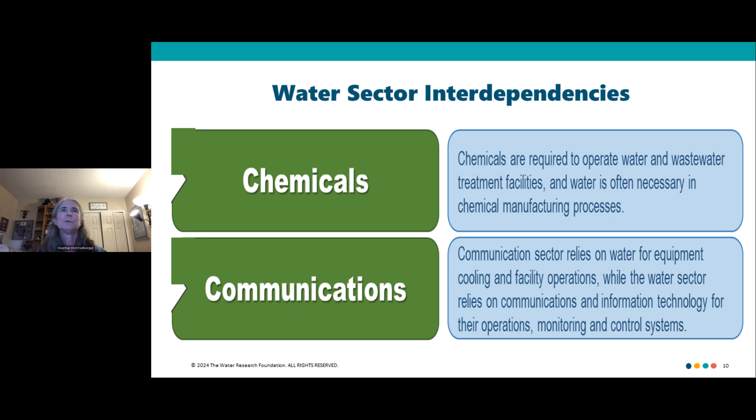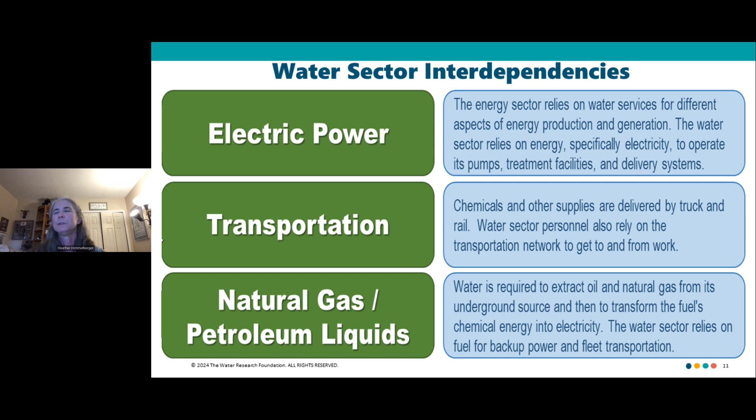Fuel requires water to extract oil and natural gas from its underground source and then transform the fuel's chemical energy into electricity. The water sector relies on fuel for backup power and fleet transport.

So let's get into why these interdependencies can be disrupted. One thing we looked at is how these sectors work together to plan, respond, recover, and adapt to what we call black sky events. Black sky events are high impact, uncertain probability events that can cause a combination of severe physical damage to infrastructure and widespread long-term duration outages.

Since the beginning of the project in early 2021, utilities were dealing with more frequent and severe events. And of course during that time they were also dealing with one major event that affected everybody, which was the pandemic. The shocks and stresses of black sky events disrupt those connections between the water sector and other sectors.

So when we were interviewing the participating utilities, there were many discussions on how they plan, respond, recover, and adapt to these black sky events. And from those discussions emerged some common themes.

We used those common themes to create this document and put them into six themes, which became modules or chapters in the report. They were based on utility examples of how they absorbed, adapted, and capitalized on the shocks and stresses they were exposed to.

About 70 case study examples from all the utilities mentioned at the beginning of the talk were included. The fundamental practices module focuses on the major critical infrastructure or lifeline sectors we just discussed, like power, fuel, chemicals, transportation, and then the subdomains of operational resilience and water availability.

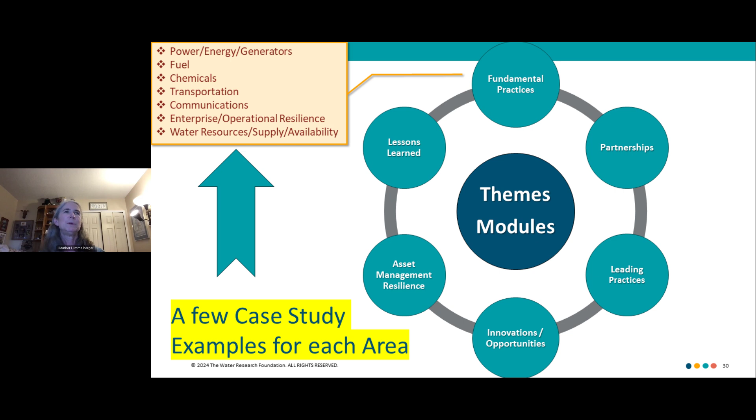There are again 70 case studies in here, so there's going to be way more than we're going to cover today, but I just wanted to share a few for each one of these so you can get a flavor of what the document has in it.

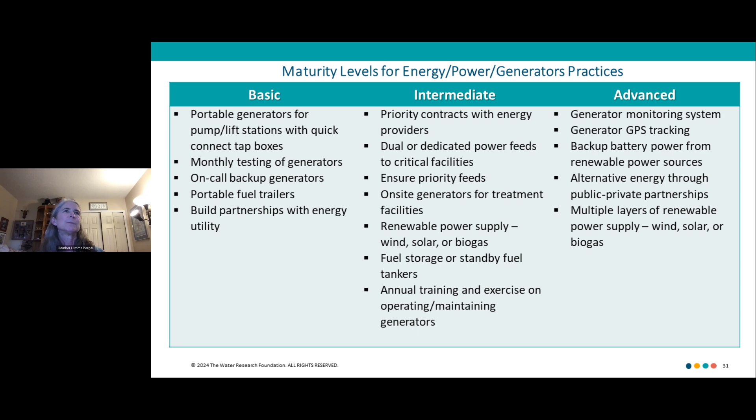So we're going to start with energy, and energy is basically the most important sector. That's where we see the most critical ties between water and energy, because they each need each other. When one goes down, it affects the other, which in turn keeps making things worse. So energy is probably the most important for us to be thinking about the interdependencies.

East Bay Municipal Utility District is the first case study we're going to talk about, and we're going to talk about public safety power shutoffs.

Not everybody experiences these, but these are cases where high winds or some other condition may require the power company to shut off power to prevent serious fire or other conditions from happening. So they're going to shut down the power and let people know the power is going to be shut off.

The way that East Bay MUD mitigated public safety power shutoffs was with portable and on-site generators. On-site generators are used for key treatment and distribution facilities. Portable generators and pumps are ready to be deployed with electrical connections or pumping tees. The utility also contracted with local suppliers to provide additional generators if needed to meet their needs.

In some instances, the generators are pre-deployed during wildfire season based on the pumping plant's location in the wildfire area and the expected time for the reservoir to drain if the pumping plant is out of power. In addition, regular training and exercises are conducted to practice the deployment, connection, and use of generators.

When a red flag warning is issued by the National Weather Service, the utility will ensure finished water reservoirs are full in case there is a shutoff, and also to support firefighting.

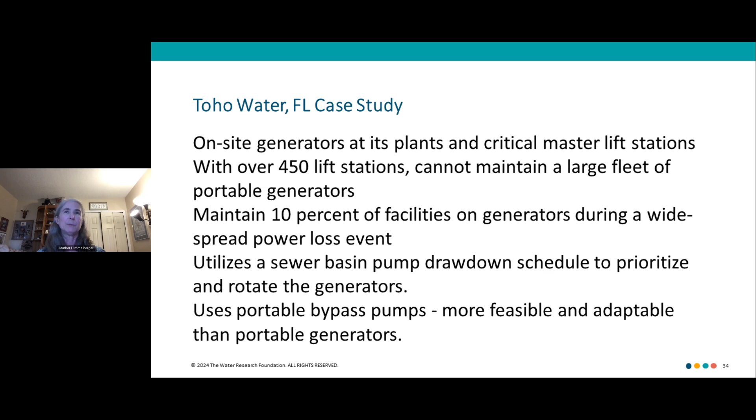The utility also uses portable bypass pumps, which are more feasible and adaptable than portable generators. So just a slightly different way of dealing with the same kind of problem—there are more ways than one to address the situations you're dealing with.

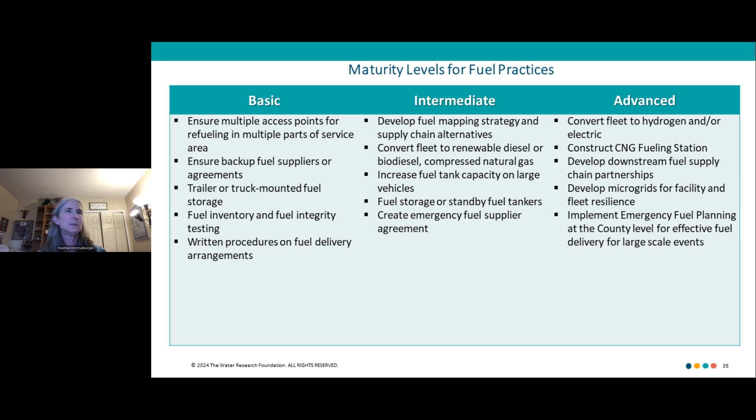Now we're going to move on to fuel practices. East Bay MUD reduced its fleet emissions by switching to renewable diesel, a cleaner burning, domestically produced renewable fuel. DC Water contracts with the DC Public Works Department, which developed a fuel mapping strategy to assess fuel from several sources and deliver fuel based on the district's priorities.

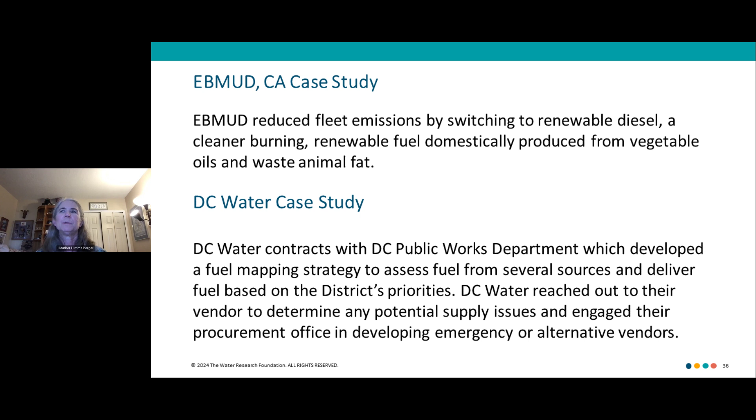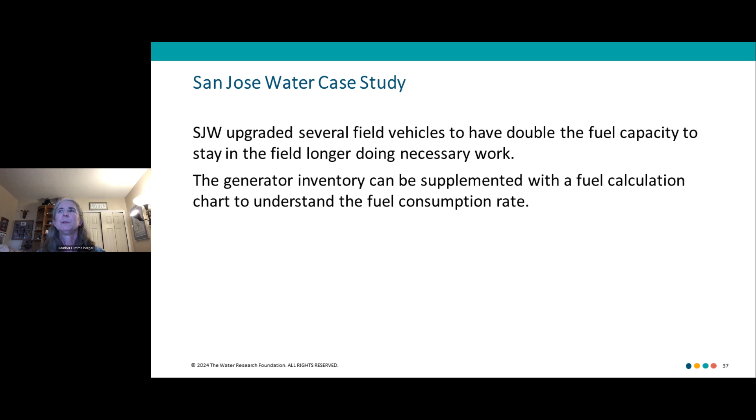DC Water reached out to their vendor to determine any potential supply issues, and engaged their procurement office in developing emergency and alternative vendors. San Jose upgraded several field vehicles to have double the fuel capacity so they could stay in the field longer doing needed work. In an emergency that can be super important, especially with a large distribution system where you need to get across quickly—it's really important to have that extra fuel capacity. The generator inventory can also be supplemented with a fuel calculation chart to understand how fuel is being used.

Now we're going to move on to chemicals. In Austin, Texas, they typically keep a two-week supply of chemicals, and they also have operational strategies to conserve chemicals without affecting water compliance, water quality, and standards.

In 2018, they had a flood that led to changes in their chemical practices to better prepare for these kinds of disasters. Water usage can increase immediately before and after a disaster, which can also increase chemical needs, and that's something they needed to keep in mind. Additionally, high turbidity water can require additional chemicals—so if water quality is affected, like in this case by a flood, they may need extra chemicals just to treat the water to the condition it needs to be in.

They have a comprehensive and complete chemical inventory control system to inform the utility of current usage and supply, so they can better prepare for any impending event. They've also identified non-local suppliers, secondary suppliers, and distributors to ensure redundancy if there are any supply chain issues.

In Portland, Oregon, there was a chlorine supply issue that impacted drinking water and wastewater facilities in 2021. That was also a time of COVID, so other issues affecting supply chains were happening at the same time. This was a major production failure at one of their chemical suppliers serving most of the West Coast. They normally receive daily deliveries of sodium hypochlorite, and depending on wet or dry weather, they may need more or fewer chemicals, which affects storage, but it's always fairly short. The shortage occurred alongside an already existing national production and shipping issue, which compounded the problem.

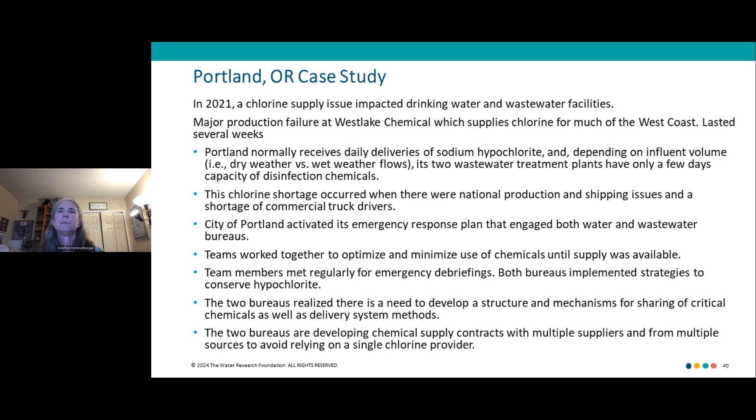And they're developing chemical supply contracts with multiple suppliers and multiple sources to avoid relying on a single chlorine provider.

Calgary, Canada, in the summer of 2020, had railway blockades that impacted the transportation of chemicals used by the city's water treatment plants. The blockades led to the shutdown of the rail network, causing a complete halt of freight traffic from Halifax west to Toronto. The spring prior to the blockades, the utility was already in close communication with suppliers because of COVID-19 issues affecting supply chains.

Aluminum sulfate is the most important chemical used by them as a coagulating agent in the drinking water purification process. The utility purchases large quantities of the chemical and is highly dependent on it, especially during the spring runoff season. The raw materials come from Quebec and are transported to Calgary, where they're processed by one of the utility's suppliers. The utility can only store a few days' supply of this critical chemical, especially during the spring runoff period when demand significantly increases.

The utility worked with the chemical manufacturer to develop alternative solutions or secondary suppliers. The blockades came down after Canada's medical officer advised against gatherings as part of the pandemic, but they have these plans ready to go if similar issues occur in the future.

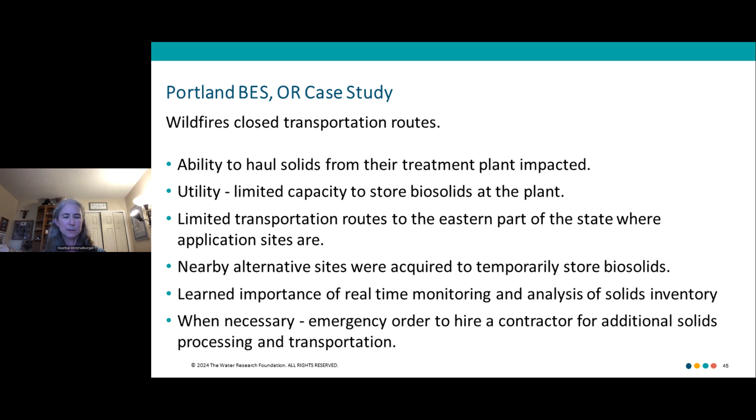Learning from this experience, they needed nearby alternative sites where they could temporarily store biosolids, so they've now acquired those. Then once the transportation routes are clear, they can move the solids where they need to be. They learned the importance of real-time monitoring analysis of solids inventory, and when necessary, they've issued an emergency order to hire a contractor for additional solids processing and transportation.

In Austin, Winter Storm Uri really affected them. If you remember those days when it was very, very frigidly cold in Texas, unusually so, that cold, stormy, icy weather did affect transportation quite a bit.

So many Austin water personnel were unable to report for work assignments because of poor road conditions. And because that type of storm is very rare, the utility did not have a ready fleet of vehicles capable of operating in these extreme weather conditions.

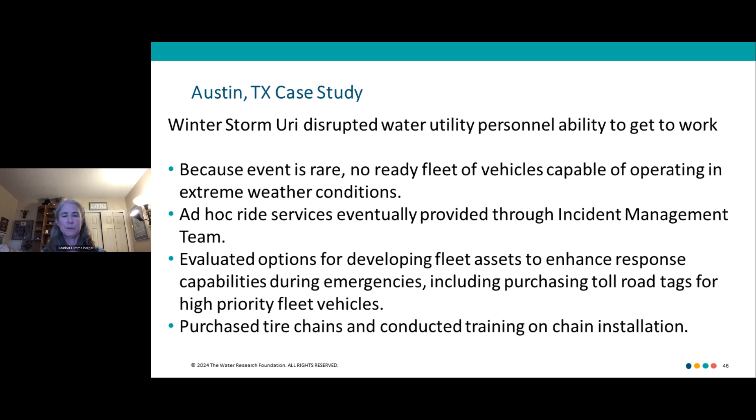So they had to get ad hoc ride services provided through the incident management team. Learning from this issue, the utility began to evaluate options for developing fleet assets that enhance response capabilities during emergency conditions, including purchasing toll road tags for high priority fleet vehicles to improve response time. They've also purchased tire chains for their vehicles and conducted training on how to use the chains. These have helped them prepare if there is another storm like that, they need to be ready for it.

Next, we'll move into communication.

In Western Australia, only the Hazard Management Agency is allowed to communicate when there's an emergency declared, under their Emergency Management Act 2005. Therefore, the key for the Water Corporation in Western Australia is focusing its messaging and conveying the importance of saving water. The utility avoids using the term crisis in responding to major events or hazards. Instead, it manages these incidents under business as usual and a 'we will get through it together' message that it gives to its customers.

This next one combines a bunch of different utilities because they all had very similar kinds of issues. Many of the participating utilities have switched from radio communication systems to cellular, and there are many benefits of cellular systems in terms of information and workflow capabilities.

However, during power outages, some cellular towers have backup battery power for only 4 to 6 hours. While most cellular networks have some level of redundancy in their coverage, removal of a single major tower in an urban area can have a significant impact on the ability to handle cellular traffic. Not being able to communicate to field staff becomes a significant issue during longer-term power outages.

Some utilities noted the ability to use Emergency Operations Center radio systems to stay connected to emergency operations and other critical sectors, but that's typically limited to just incident team members.

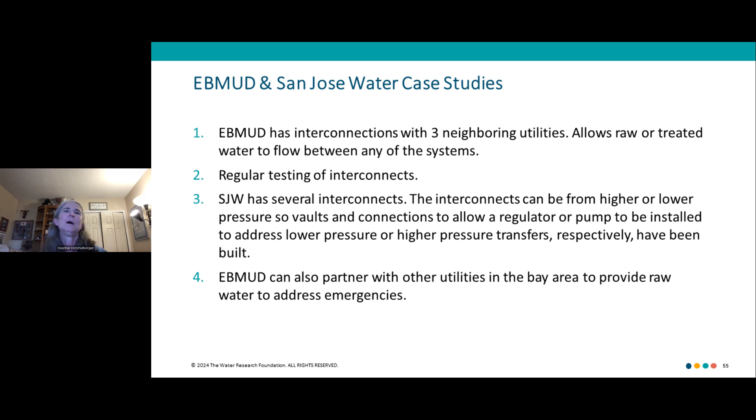San Jose Water has several interconnects, and the interconnects can be from either higher or lower pressure. So they have to have vaults and connections to allow either a regulator or a pump to be installed to address either the lower pressure or the higher pressure transfers. EBMUD can also partner with other utilities in the Bay Area to provide raw water to address emergencies.

San Jose conducted a well supply capacity evaluation that evaluated the ability of its groundwater well infrastructure to deliver sufficient water to meet future demands until 2040. They use a contracted water supply from Valley Water for a varying percentage of its water supply needs. However, if the supply is impacted by drought conditions, it can increase groundwater use consistent with its urban water management plan. Greater variability in the availability of

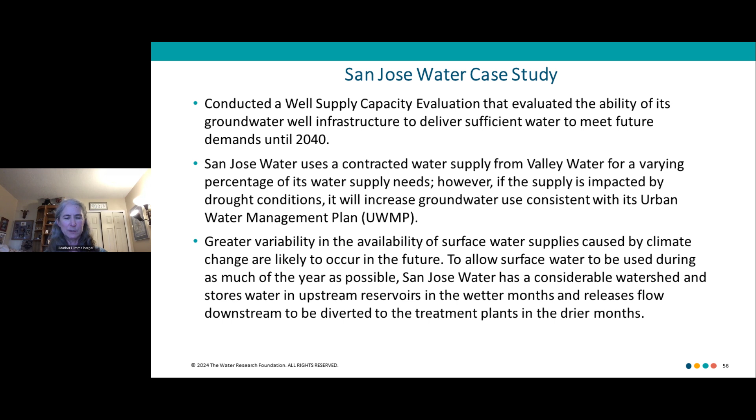surface water supplies caused by climate change are likely to occur in the future. To allow surface water to be used during as much of the year as possible, San Jose Water has a considerable watershed and stores water in upstream reservoirs in the wetter months, releasing flow downstream to be diverted to treatment plants in drier months.

In Kansas City, they have an intertie agreement with regional water utilities, and the utility is part of 6 utilities in that region that coordinate through the local emergency planning committee. Through the partnership with nearby utilities, they're able to assist with potable water interconnections, as well as parts, chemical supplies, equipment, and people. This group also provides a mechanism to coordinate assistance with other lifeline sectors, including public health and safety, hospitals, transportation, and community groups.

We're only able to get into a small part of the case study document today. There's a lot more to the fundamental practices, and remember the document has a lot more themes. I encourage you to look at the document and read the other parts. As I mentioned before, there's about 70 case study examples from all the utilities, included in each of those themes throughout the book. There's so much more that could be said, but unfortunately with time, we can only cover so much, and we can only touch the tip of the iceberg here. But I'm hoping that if you're interested in these case studies and in learning more about these various utilities and how they handle black sky events, that you'll access this document on the WRF site and go through it to find the themes and case studies that best match your needs and the kinds of black sky events you are subjected to, and use that information to help you as you move forward.

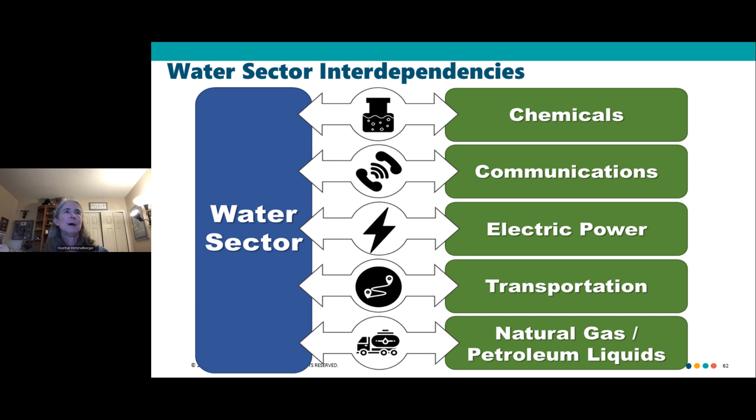The same water sector interdependencies we talked about with the case studies are included in the guidebook. We also have additional topics: operational and workforce resilience, water resources supply availability practices, partnership practices, and asset management resilience. While there's less going on in the practice of asset management in small utilities, it is a practice that is occurring, and one being encouraged more and more. So this might be a way to do both things at once, to build asset management resilience as well as resilience to black sky events at the same time.

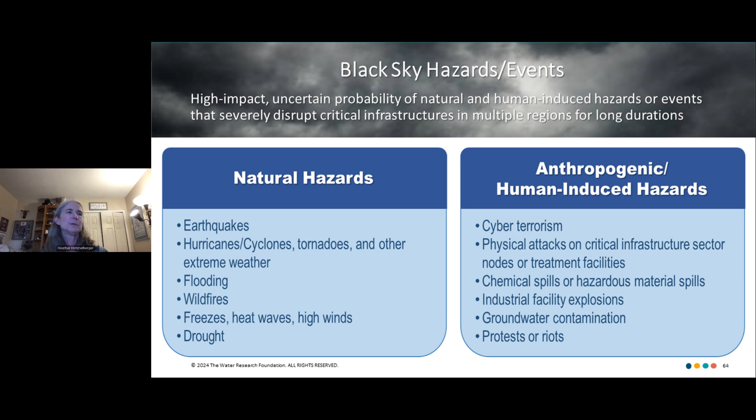We did use the same black sky events because it's really not different between small and large. It might be a matter of degree, maybe it's less likely there's a cyber terrorist event at a small utility, but it's not impossible. So we did include all the same kinds of black sky hazards and events.

Similar to the idea with the case studies, there needs to be a menu of options and ideas, because not everything is applicable to every system. So it's an opportunity to choose what fits best in the context of the system, address the most likely black sky events for that system, understand the interdependencies that are most important to that system, and strengthen organizational resilience.

So in the document, there are practice levels: standard and advanced. The standard ones are for small and medium systems, and advanced is mostly for the medium-sized systems. Again, there's no hard and fast rules, they can use any practices they want, but it was meant more that standard practices were for very small and advanced was for medium. Every section has resources along with how to access them, where they're from, what organization, etc., to help systems as they're trying to put these practices in place.

I only picked one example for each of these because there's lots and lots of them, but just to give you a flavor of the kinds of things included in the document. For energy, a standard practice is to maintain generator spare parts and materials. An advanced practice is co-resilience planning with the energy sector to decrease recovery time. And a resource is the incident action checklist for power outages, which gives information for utilities to prepare, respond, and recover from power outages. With fuel, a standard practice is to have written procedures on fuel delivery arrangements, and an advanced practice is to develop fuel mapping strategies and supply chain alternatives.

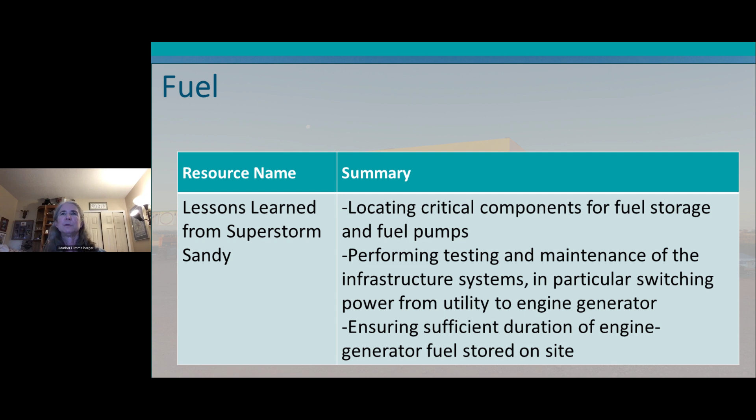And a resource is lessons learned from Superstorm Sandy. That had a huge impact on utilities in that area, so they created a pretty good lessons learned document that has a lot of great information.

With chemicals, the standard practice example is to develop partnerships to share chemical needs with neighboring utilities, as you saw in the Canadian example where utilities had to work together to address their needs. Another practice is using chemical optimization to determine the lowest level of chemical dosage, so we don't have to use as many chemicals but still achieve the treatment we want. One resource is Supply Chain Resilience, a guide for water and wastewater utilities.

In transportation, a standard practice is training for driving and using emergency equipment in inclement weather conditions. That training is super important, because if you've never used chains before, you can't just figure it out on the fly. You have to have the training. Another practice is developing transportation route alternatives for service delivery. The National Infrastructure Advisory Council's Transportation Sector Resilience is a resource in that section.

For communication, develop risk communication procedures with template messaging that is brief and easily understood for all customer classes. As an advanced practice, ensure incident team members have radio capabilities or access to the local emergency communication system. A resource is Water Utility Communication During Emergency Response, and again, there are many more resources in the book.